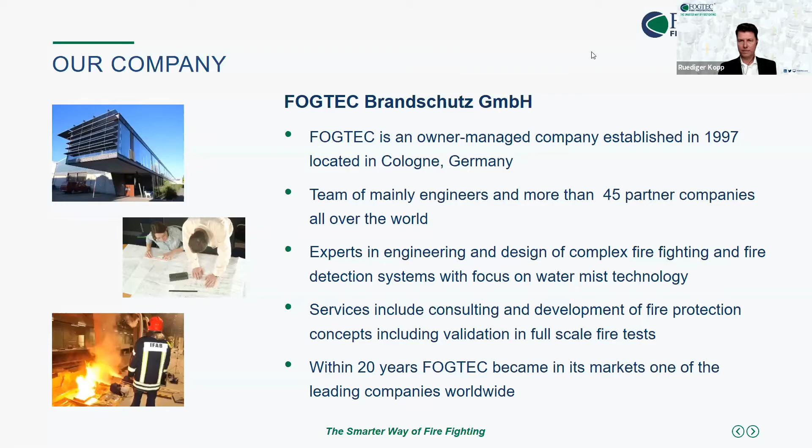So the agenda is, just a second, there we are. I will first of all give you a bit of a background why fire protection for heritage buildings is so important. And water mist is not completely new to this field. This is one of the first fields where water mist technology has been taken into the market, where there was a request by the market, by consultants, by clients, for a technology which uses water to fight fire in a very sensitive way.

And I will give you a short introduction why we see water mist as a good solution there. And then I will speak briefly about how the technology works, where the benefits of the technology are, before I then come to the already mentioned case studies, where I have quite a number of those in different fields to give you a good idea. And then I will come up with a conclusion of my presentation, and at the end we will have sufficient time for questions and answers.

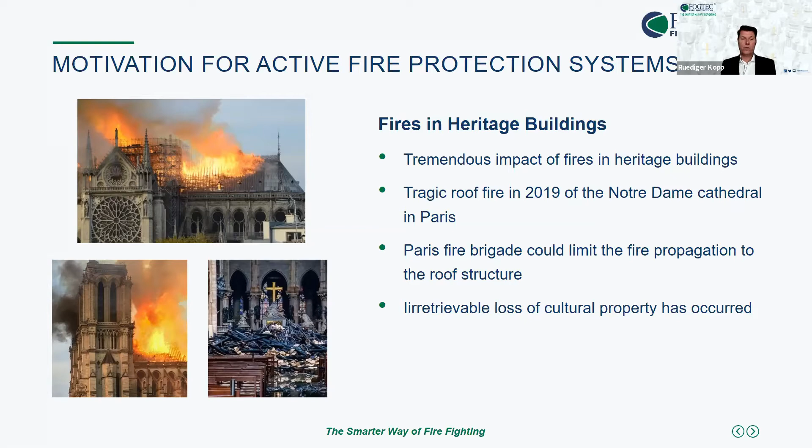So obviously fires happen, and there is a need for fire protection for such buildings. But historical buildings are very sensitive structures. So fire protection is something that really must be looked at in such a structure, because often fire protection has not been a key focus when these buildings were built. And so the whole building in many cases is one complete fire zone. There are no partitions in the building. So if a fire starts, it very easily can travel throughout the building and cause substantial damage throughout the structure. So fire spreads very quickly.

In addition, we can have very different types of fire loads in the building. A lot of these historical buildings store old goods, documents. A lot of them are used as archives, as libraries, but also a lot of them are used as museums, where you have very valuable goods, and these goods can be of very different kinds. The building structure as such can also vary a lot. In many cases, wooden structures are used, which of course can also have a strong impact on the fire, particularly if wooden floors, for example, are used. So fires can propagate in such areas very quickly and cause substantial damage.

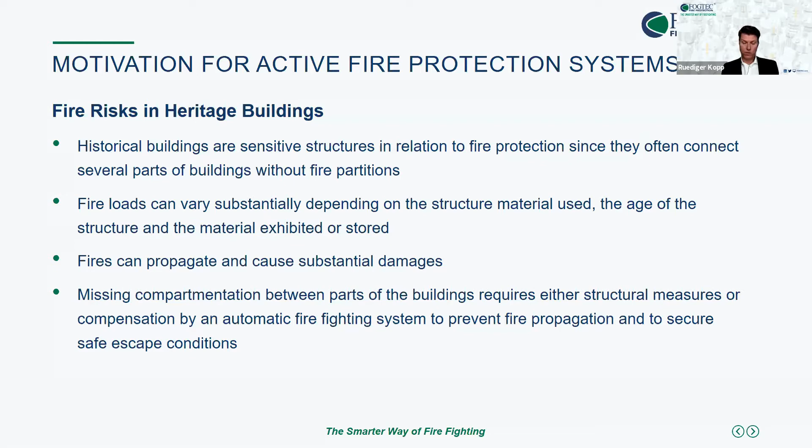And of course, this also is done to allow self-evacuation for people who are in the area, and also safer approach of the fire services to the building. So what is key in all these projects is that there is a detailed fire risk assessment first before a system is offered, because there's no universal approach to fire protection in heritage buildings. They differ so much from each other. So it's always a custom-made, a tailor-made solution in regard of fire protection for the building.

So water mist in the last 20 years has developed as an interesting technology for this kind of environment, due to its high cooling ability and also partly smoke reduction, so limitation of smoke spread throughout the building, but also doing this with the minimal amount of water. And this, of course, then prevents large water damages, water runoff in areas which are not directly affected by the fire. So this is something that we will talk about today.

But water mist also can have some cost saving in such historical structures, particularly because they are retrofit installations, and structural measures like cladding for wooden structures and so on are often difficult to be achieved. And this is where water mist, by its high cooling ability, has a chance to compensate such structural measures, which in the end leads to a good solution for the problem.

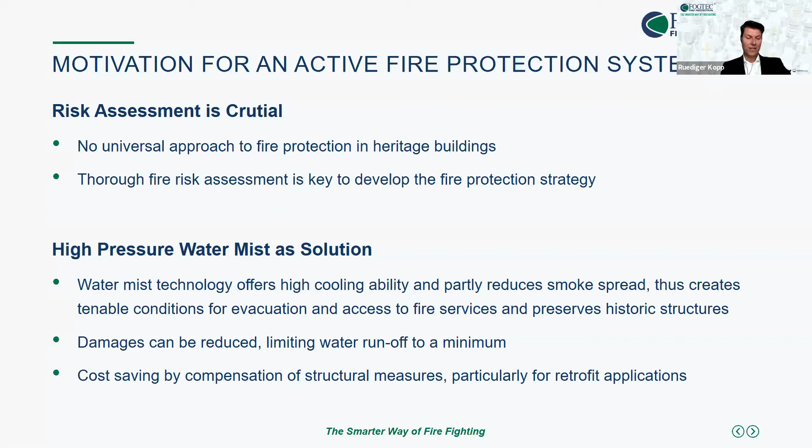The water, instead of just being sprayed into the area, is atomized into minute droplets. The cooling ability of a firefighting agent is directly related to the surface area made available, because there you have the interaction between the fire and the firefighting agent, the water. And due to these very minute droplets, we create a far larger surface area with the same quantity of water. And due to that, we have a substantially higher cooling effect than a conventional sprinkler system.

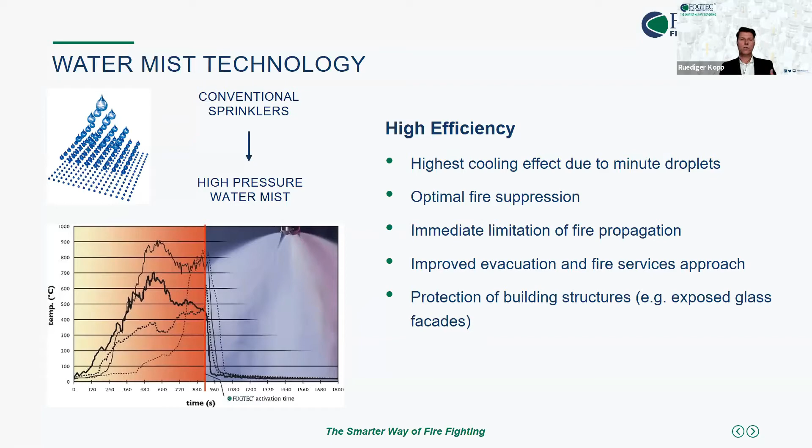And this, in the end, of course, also protects building structures from the heat radiation of a fire. So building structures like an exposed glass structure can be cooled and preserved from the heat radiation. We have a number of cases, I will come to this during the case studies, where instead of fire-rated glass, we could use ordinary window glass in combination with the water mist system, which also has a very positive cost impact, reducing the overall cost of the system. But by atomizing the water into these small droplets, we only use a fraction of the water of a conventional sprinkler system.

And of course, you can imagine in an environment like a heritage building, this is key for the building operators to look into the technology, to make it attractive, to preserve and prevent water damages in the area.

What is also different with water mist is it's not a pure two-dimensional system. It does not only spray on the surface, but fills the whole volume underneath the nozzles. It's almost three-dimensional in this field, and it also reaches some hidden spaces by that. So this is another benefit which can be seen in obstructed areas.

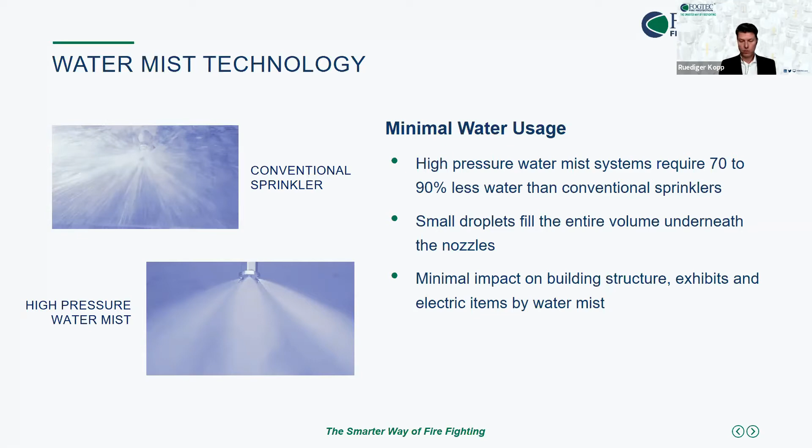As a following, I have a short video which shows a bit the difference. So you see here the discharge of a conventional sprinkler system. It's really like rain, it sprays from the nozzle.

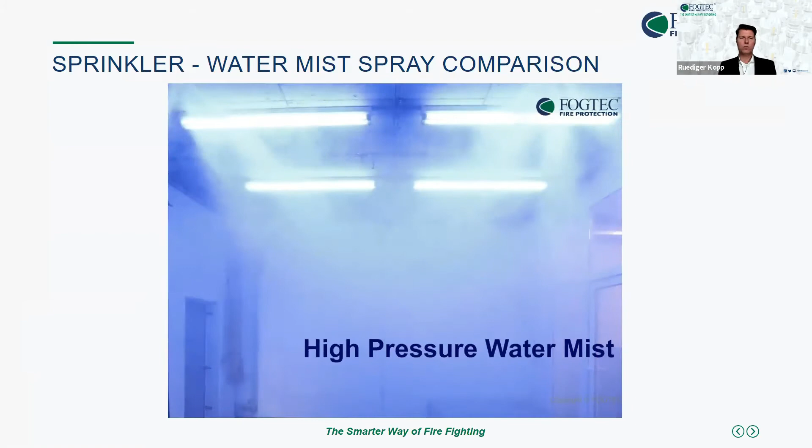And now you see the high pressure water mist technology. It has these very small droplets, but it's not really that they spray on the floor, they fill the ambient and have this immediate cooling effect. This is really a great difference. You see the room here is a demo area where a lot of customers can stand inside when the water mist system is activated, and they are all surprised how little water is discharged from this kind of system.

So water mist is also not a completely new technology. It's been around, as I said, for more than 20 years now for building protection. There are a number of standards used as a design reference for the system, also used for approval and certification reference. On the one hand, there's the American standard, the NFPA 750, which has been around since 1996 already, and is used as a reference.

In Europe, the EN standard 14972 is referred to a lot. And then there are national standards, like in Germany, we have the VDS 3188, which regulate this type of system.

Now, what is different in this standard, compared to sprinkler technology like the NFPA 13, is that it's not prescriptive. You won't find in the standard details on what is the maximum distance between the nozzles, the maximum installation height, the K factors of the nozzles, or the minimum pressures, because this is all very much related to the supplier developing their own system around this, and then the supplier has to prove that the system is able to carry out certain measures like fire control, suppression, and extinguishment in full-scale fire tests.

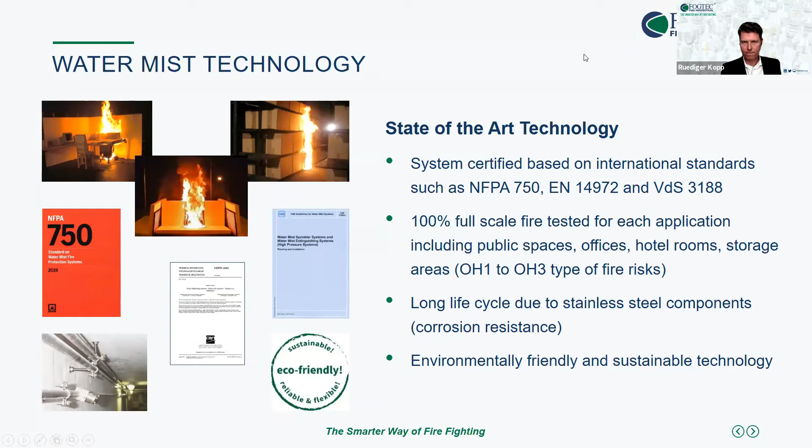Another aspect is that the system is quite versatile and flexible to be integrated. It has a high system flexibility, and it has a modular approach. The system is set up similar to a sprinkler system, we can say.

Normally you have a centralized pressure makeup unit, a pumping unit, which is usually installed in the basement of the building. But especially for retrofit into historical buildings, we had a number of cases where there was no space, no possibility to install it in the basement, so we, for example, installed it in the roof area of the building. This is also possible with the system because the equipment is quite compact and modular.

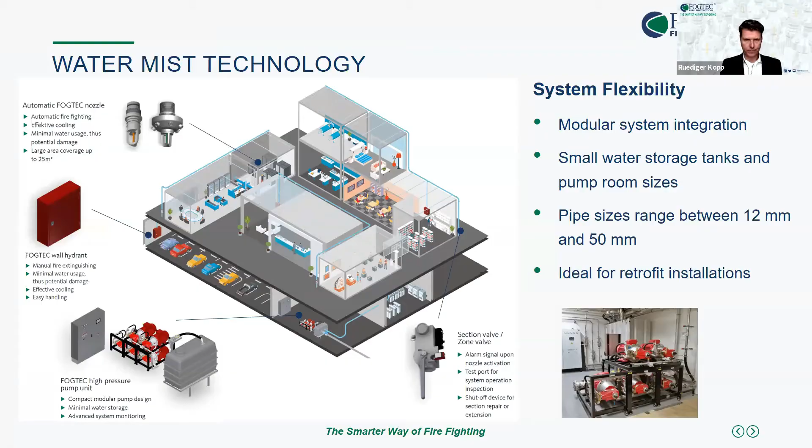I believe this gives you a good outline and understanding of how the technology is integrated into the building. Before I move to the case studies, I'd like to ask an additional question. Since many of you are architects, what are your concerns about installing an automatic firefighting system into a heritage building?

I assume most of the concern will come from potential water damages. This is at least what we heard a lot in the early days. But also, in a heritage building with very valuable ceiling structures, gypsum ceilings, paintings on the ceilings, it's very difficult to install the piping. That's where water mist really has a benefit.

Yeah, that's what I expected. Most of you think there's a concern about water damages, and indeed this would happen with a conventional sprinkler system. It tackles the fire, takes care of it, but there's a lot of water runoff which can cause damage. From the integration point of view, pipework installation, places to install pumping and water storage equipment, and cost considerations are quite equal in your poll. All of these can be a reason for concern.

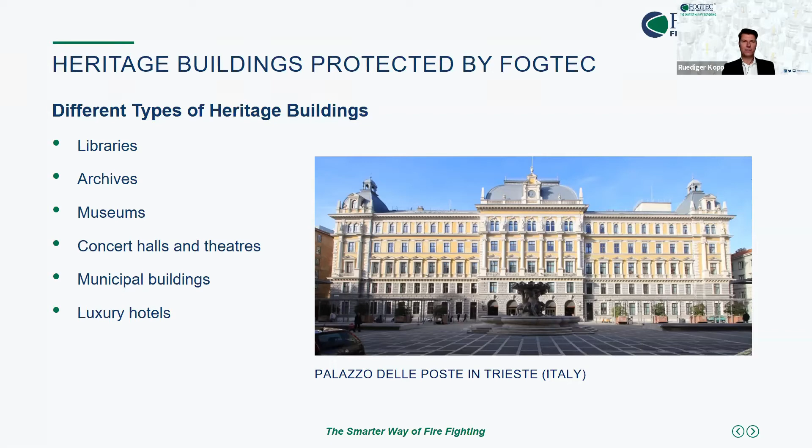The building you see there is one of the first installations we did in Italy, also full of documents, where the system was installed to protect the archives. But coming to the first one - this is an application where we installed the system more than 20 years back, quite a long time.

The system is in operation at the Municipal Library in Trier, Germany - one of the most significant libraries for historical books and documents in Germany. They have a great collection with 750,000 books stored from the last 1200 years, including a lot of old Bibles, very valuable books. In total, they estimate the value to be around 250 million euros.

This building was erected in the 1950s, but up to the late 1990s it did not have an active automatic firefighting system. There was detection installed, so they knew if a fire happened, but they relied on fire services to approach the site and carry out final firefighting measures, usually using a lot of water.

This is where local authorities had great concerns and requested retrofitting an automatic firefighting system to the buildings. We're talking about 7-floor buildings, and it takes quite a while for the fire brigade to reach all areas to tackle fires, so fires would normally spread and cause a lot of damage. This is where different technologies were looked at.

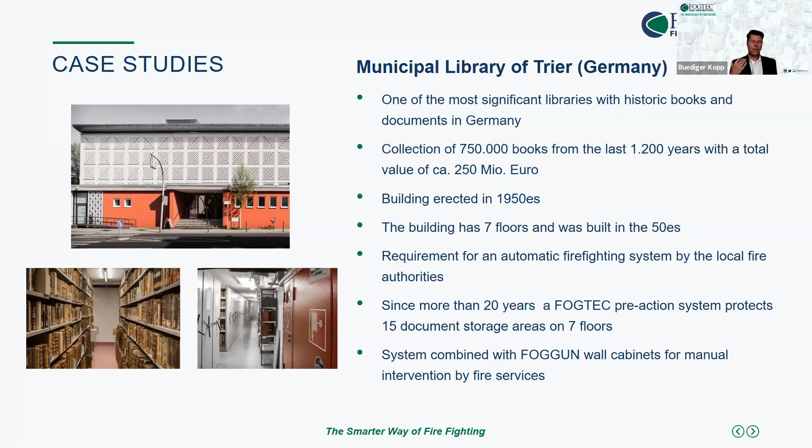And so the fire services have been trained on this. Once they arrive at the site, they pick the gun and carry out extinguishing measures into the area. So this has been the approach, and the system has been up 20 years. Fortunately, they did not have a fire in this time, but they are very happy and feel very safe with this system installed.

And this is where, again, they looked into different technologies, but with the same motivation as the previous client. They saw water mist as the best solution because of the little water usage, the little collateral damage it would have, and particularly for the heritage part of the building, the small piping to install the system along walls and ceilings so as not to interfere with the heritage appearance of the building. So they have been very happy.

A challenge, like in the previous one, has been the sliding shelf areas, like you see on the lower right picture, because once the shelf is completely closed, how can the water mist penetrate inside? So the concept in such an area is that ceiling mounted nozzles are installed so that in the area where you have the gap, water mist can penetrate and limit the fire spread from one shelving area to the neighboring one.

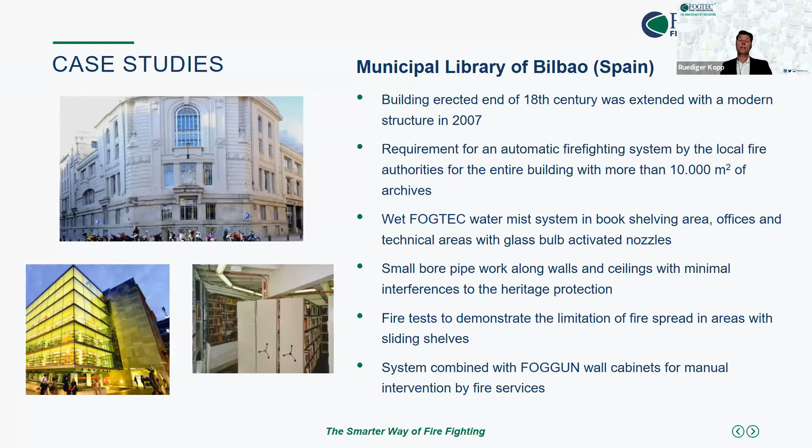But this building has also been retrofitted with the water mist handheld guns for manual intervention by the fire services. Once they approach such an area with sliding shelves, they would open up the area where the fire has happened and manually tackle it, using a very little amount of water. Again, that concept has been followed in this reference, and similarly in this building.

This is a very old building from 1757 in the city of Turin in Italy. It's the Scientific Academy. It houses more than 60,000 ancient documents from the last 400 years, including public entries, patents, and so on. Very valuable goods.

So here a special approach had to be developed. And this is what I said initially, water mist allows for an engineered approach to this. So that's where specific fire tests were carried out. In this case, we don't have ceiling mounted nozzles, but we have sidewall mounted nozzles being installed in different levels along the sidewalls, where, of course, the books are stored, so where the main fire risk is, but also spraying into the center and making sure that this whole auditorium is protected in an adequate way.

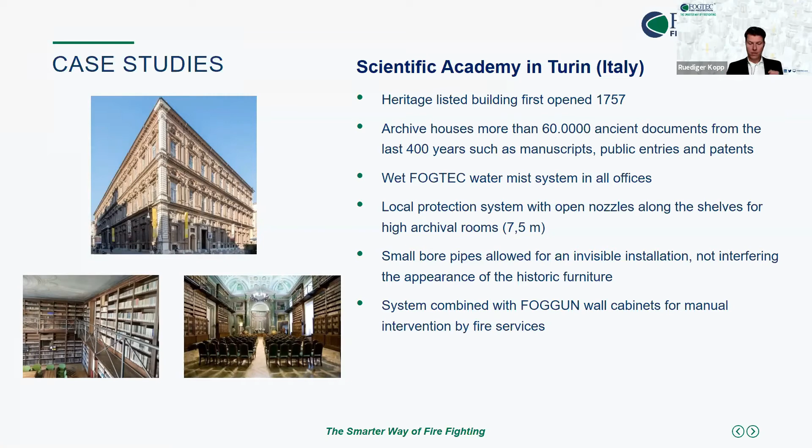And this, of course, then is also always accompanied by a fire consultant, which then looks into the fire test results and approves the kind of concept for the building. Again, here we have then combined this with the water mist gun for manual intervention by the fire services.

A very large archival structure which we have protected, you can find in Paris. That's the French National Archive. Into the building you see there are 320 kilometers of shelves which are protected. You have different kinds of documents. There are paper documents, but they are also storing tapes. So there's also kind of plastic fire loads. That's why the customer requested specific full-scale fire tests to demonstrate the ability of the system, which was done for this project, both for fixed shelves as well as sliding shelves. So the concept has been verified before the installation into this building.

And in total, in the high building you see behind there are 200 archives of 200 square meters each. So we have a total protection of 40,000 square meters plus the office areas in front. So in total, 48,000 square meters of protected area. Quite a large installation in such an archival environment. But the customer is very happy. This system was also installed more than 10 years back.

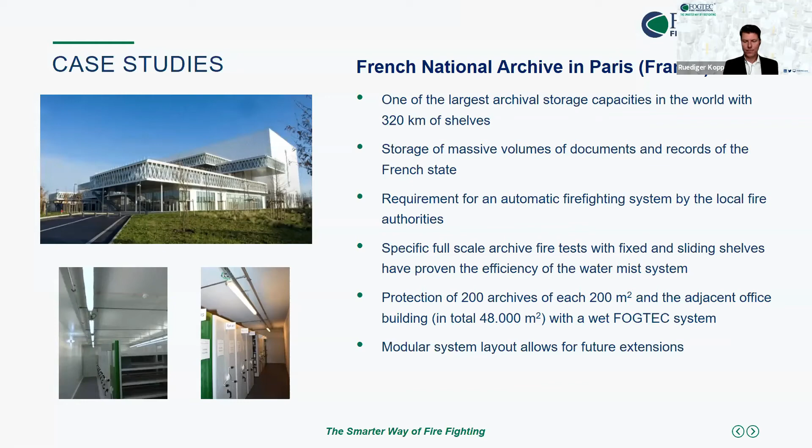And it also allows for an extension. So they actually are looking into further extending the areas to be protected. And this modular layout, which I presented before, allows for that. So they have the section valve installed, and the piping behind the section valve can be retrofitted, can be installed at a later stage. Yeah, I was also mentioning museums.

So, of course, museums with water-sensitive goods and exhibits are key for a system which uses little water. And here's one example from Italy, in Turin, the Egyptian Museum, which was erected in 1824. So a historical building as such, which is of course also listed, but inside it has the oldest and largest Egyptian exhibits in the whole world. So it's more than 30,000 exhibits, a lot of which are water sensitive. So papyrus rolls and so on. You can imagine if you spray water on that, that's a disaster.

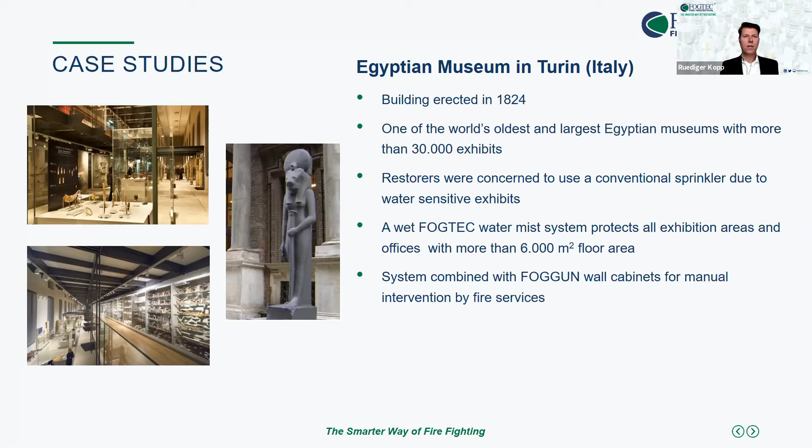And this is again where the client has looked into a system which uses as little water as possible, but is as efficient as possible for the area. And today, a high pressure water mist system is protecting all the exhibition areas, all the offices throughout the building, again in combination with the water mist guns for manual intervention by the fire services.

A gas extinguishing system was not seen as a good solution here because especially deep-seated fires are not taken care of very well by gas extinguishing systems. And a sprinkler, obviously, they didn't want to discharge on the area because of the large water consumption. So water mist was selected as the best possible option to protect the atelier, the storage room in this building. So again, the same reasons, but you can see here the variety of the system.

And another museum in Germany, this one in Moers, close to Cologne. This is an old castle, which is used and operated as a museum today. It houses very valuable artifacts in wooden structures. The building as such has wooden floors, so valuable floors, and it has a wooden attic, as you also can see on the lower left picture, which is always a challenge because in this area you have an exhibition area, so people are also walking into this and have to find escape routes.

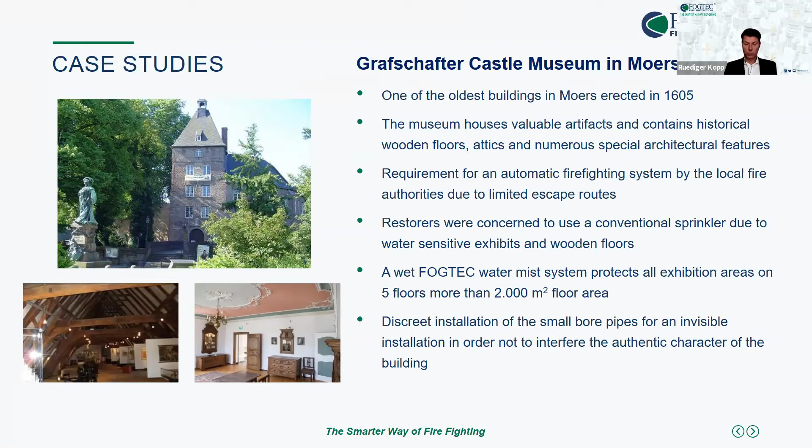So a system was installed on all 5 floors of the building, protecting a total of 2,000 square meters of floor area, and again it is a very discreet installation, almost invisible in regard to pipe installation, which was also key for the conservators of the building.

Yeah, we have here a university building in Vienna. It's the University of Applied Arts. That is also a heritage building structure. You see that on the top, but that one again was also extended by a modern structure behind the building. That's what you see here on the lower photos. On the left one, you see the atrium of the building. Now, here we had a real challenge because this area is quite high. So we had to again come up with an engineered solution.

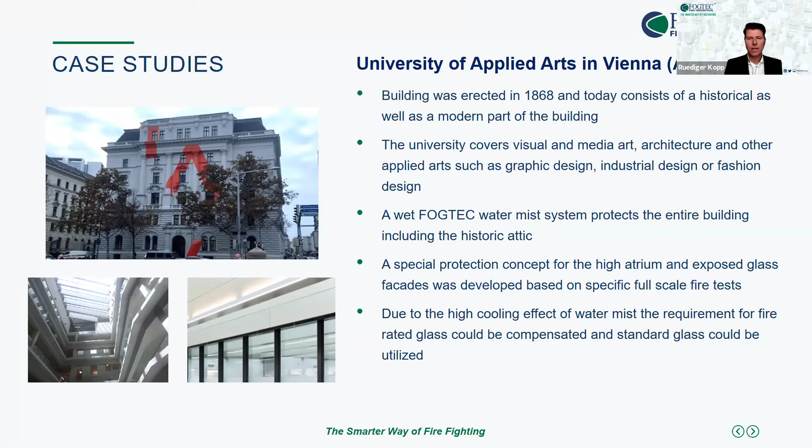They were concerned about the inner glass facades, what you see on the lower right photos, where the glass they used is ordinary window glass, and they were concerned about the fire affecting this and breaking it and then having smoke spread throughout the building. And this is where water mist has been seen as beneficial in tackling such fires, reducing the heat radiation to the glass, and by that protecting such areas efficiently. And this has been installed throughout all the glass facades within the building to create a safe environment for the building.

Yeah, coming to the concert halls, this one is quite famous. It is in Hamburg along the river Elbe. This is the new outstanding building in the city of Hamburg, one of the world's best concert houses in regard to the concert hall as such. The whole building is quite large, but the real challenge has been the main concert hall, which you see on the lower picture. This is an area with 2,200 seats, but with a height of 25 meters. So a ceiling mounted system in this area is impossible to install.

A sprinkler system was not a choice because of potential water damage, but also water mist could not be installed in the ceiling. So again, we had an engineered approach here with floor mounted nozzles, which are installed along the seat rows. They are normally covered by a lid, and only in case of fire detection is the system activated and water mist sprayed from the bottom upwards to protect the area. But the fire load is close to the seating, so it's not in the air volume above.

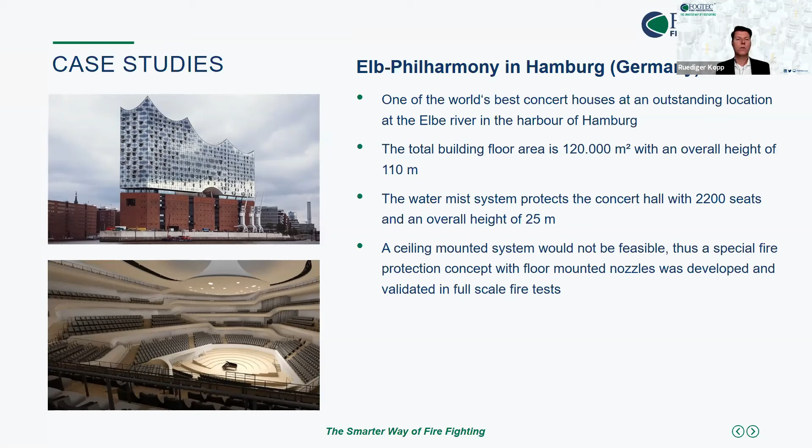So this concept, of course, has again been validated in full-scale fire tests, and the consultant, the fire services, all parties involved, the clients, the insurer, they all have accepted the solution, and this is how the building has been protected. And this kind of concept has then been used for various other buildings, which I will come to in a minute.

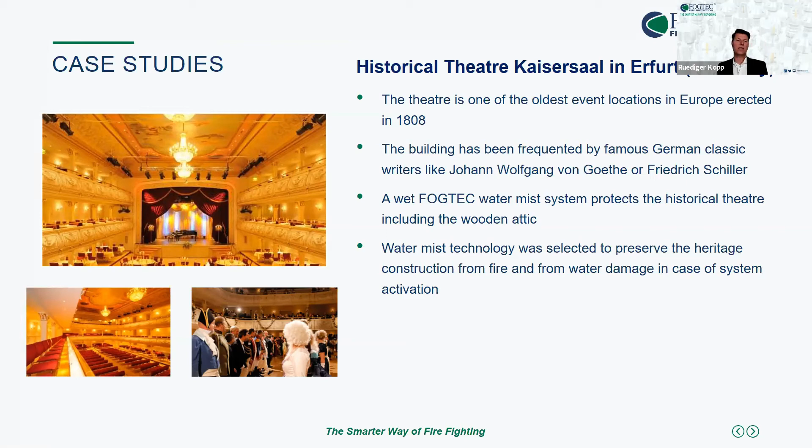Again here, a theater, the Kaisersaal in Erfurt in Germany, a very old building from 1808. Famous German classic writers like Johann Wolfgang Goethe or Friedrich Schiller have already been in this building. Again here, little water usage has been key to protect the building from potential water damage.

And this has also been the case in Venice, in the La Fenice Theater in Italy. This building has had 2 fires. It was initially opened in 1792 as a listed building, but then there was a fire in 1836 where it was destroyed and reconstructed. And then in 1996, there was a second fire which severely damaged the building.

And this is where it was decided, of course, to install an active firefighting system. Again, water mist has been seen as beneficial, particularly in the attic area here above the concert hall that you see on the lower picture, with the very valuable ceiling structure you see there.

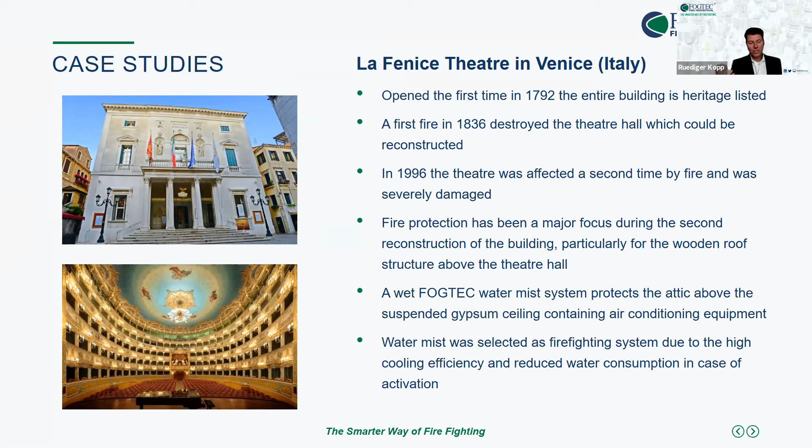And they were concerned to use sprinklers, conventional sprinklers in the attic, because the water discharge would soak into the gypsum structure and would cause the whole ceiling to collapse. And they were then happy, of course, to use a system which used much less water than a sprinkler system to protect such areas.

And this is a similar concept that has been used in a German theater in Hamburg here, where you see also the type of structure of the building is very similar. Again, this concept has been used. And this system has been combined with the floor-mounted nozzles, similar to the Elbphilharmonie in Hamburg. Into this building, you have a combination of nozzles installed into the area which can be protected with a ceiling installation. And in the audience area, as you can see there, there's this floor system, which makes sure that in case of a fire, water mist is discharged from the bottom up to protect the area, to make sure that people can safely be evacuated.

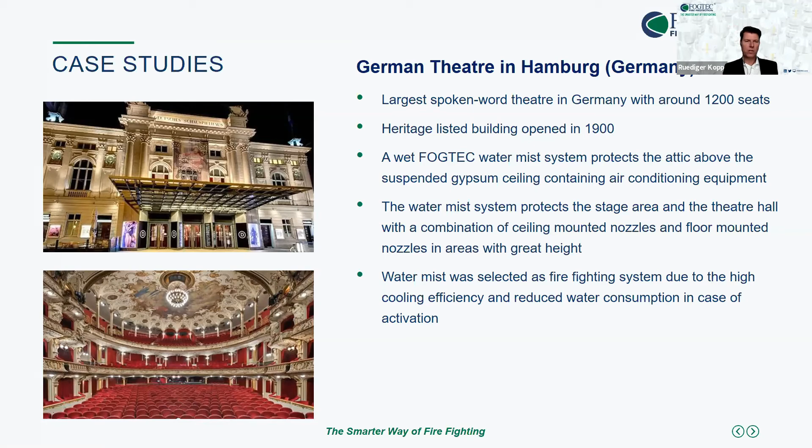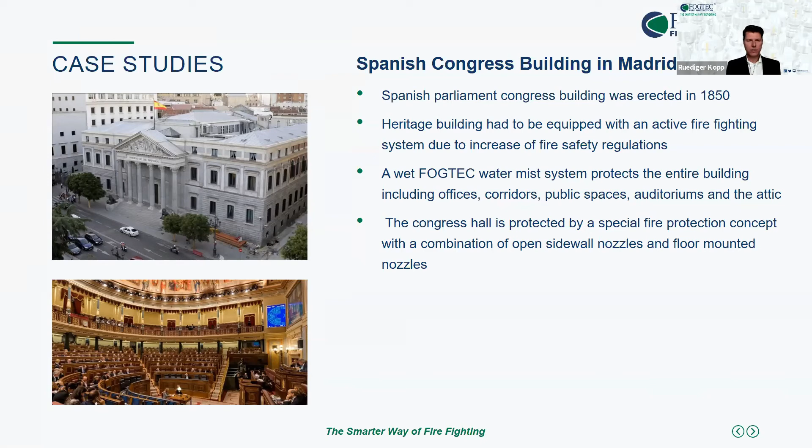A similar concept has been used in the Spanish Congress building, as you can see here in Madrid. Also there we have quite a high ceiling height. This building is also a heritage building from the 1850s. So the little water usage has been the reason to install the system into all office areas, the public spaces, but also the auditorium and the attic of the building. And here again in the auditorium, we have this combination of floor-mounted nozzles and sidewall nozzles in the areas where they can be installed.

The same has been followed also in this project. That's the town hall in Madrid called Cibeles in Spain. Also a historical building which was initially built as a postal service headquarters and turned into the town hall, which required the building to be retrofitted with an active firefighting system. And this is where the whole building has been protected by a water mist system.

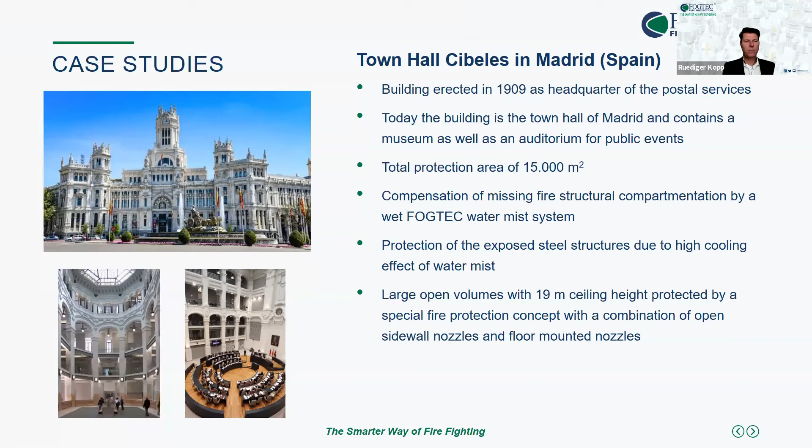Again, a challenge here has been the areas with a great height of up to 19 meters. No ceiling-mounted system could be installed. So again, a combination of the floor-mounted nozzle in the area you see on the lower right picture has been installed, and on the lower left picture sidewall-mounted nozzles have been installed. Again, the whole thing validated by full-scale fire tests.

So the very filigree piping has been key. The pump unit in this kind of building is installed on the roof, in the attic area, because there was no other space to install it.

Coming to the last cases, which are hotels. As I said, it's especially if you have historical buildings which are retrofitted into hotels. But in this case, it is a building which always has been a hotel. It's quite old. It's from 1486. Already then it was operated as a guest house. This today is a Radisson Blu hotel. It's called Schwarzer Bock in Wiesbaden in Germany, one of the oldest grand hotels in Europe.

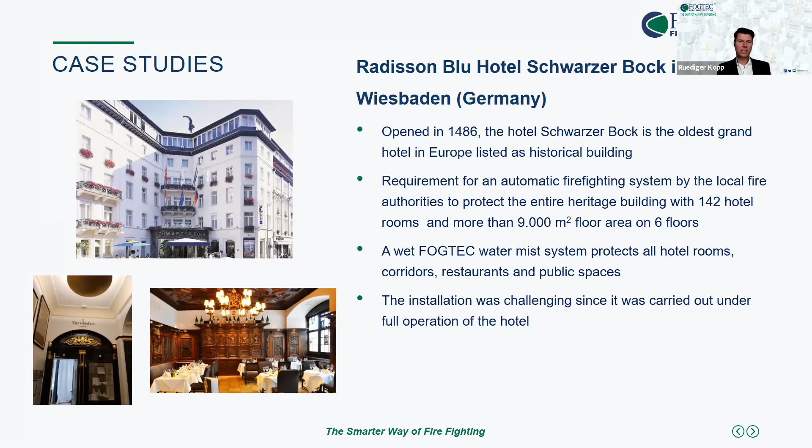Historical building. Here all the hotel rooms, 142 we have in the building, but also all the public areas, the restaurant areas, all these areas are protected with water mist technology on 6 floors. They have very valuable wooden floors. So using a little amount of water has been key to integrate the system, and also not seeing the piping, not interfering visually with the architecture of the building has been key.

And this is very similar for this building. That's even a building from the 1830s in Scotland. The Cameron House Hotel, very high-class hotel, 5-star hotel. This had a severe fire in 2017, and when it was reconstructed, an active firefighting system was integrated. Again, water mist was seen as beneficial because of little water usage, filigree piping. You don't see it under normal conditions. So this is where it was seen as beneficial.

And as a last application, I will come to an application in Israel, where jointly with Paragon, our local partner, we have installed a high-pressure water mist system into the listed heritage building of the Baha'i World Centre in Akko.

This is, as you probably all know, a listed building, and based on the huge fire in the Notre Dame in Paris, they decided to install an active firefighting system, an automatic firefighting system, in combination with the refurbishment of the entire electric system of the building, to make sure that in case of a fire, the fire is taken care of with as little collateral damage as possible.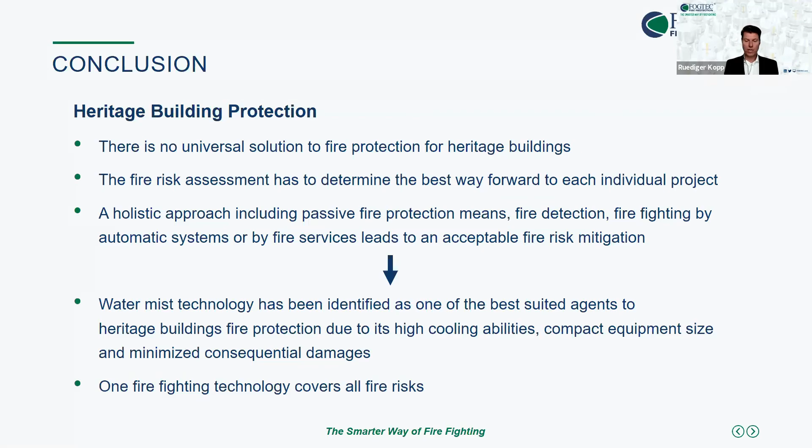So this is where I want to conclude my presentation, but I would be very much interested to hear from you what you are taking from this. So what are the takeaways when you have heard this and have seen the reference cases? Where do you see the benefits of water mist technology when protecting heritage structures? So we have another poll coming up, and maybe you can just type that in to give us also a better understanding of how you value the technology.

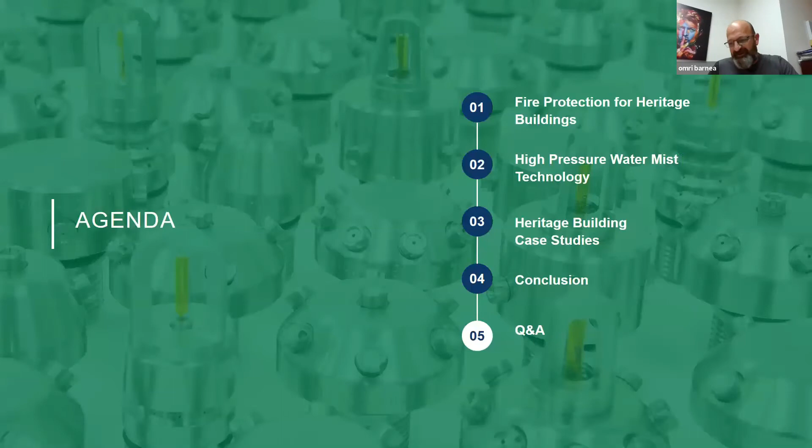Yeah, it was very interesting. The first question is, what is the minimal pressure for the system? Yeah, so in our cases, our minimum pressure is 60 bar. We use the pressure to do two things. One is to atomize the water into small droplets, and you need a certain energy to produce very small droplets. You can also do it at lower pressure, but then you don't get these very minute droplets.

But what is also key is that these small droplets have to reach the fire. To make them travel from the nozzles, which can be up to 12-meter height, as I said, down to the floor area where the fire happens, you need to give the droplets kinetic energy to accelerate them. And this is what the pressure energy is used for: to split the water and to accelerate the droplets so you can overcome great heights but still use very small droplets. So our minimum pressure we operate at is about 60 bar.

Okay, there is one question that I think is not related to this subject. Someone asked if we can use water mist for a room with lithium batteries.

I will address this to whoever is interested: check the Paragon Academy page on YouTube. We have a lecture by Max that spoke for 50 minutes about lithium batteries. Very good, and this is one of the key development fields at the moment for water mist technology. Yes, I know, we had a nice lecture from Max regarding that.